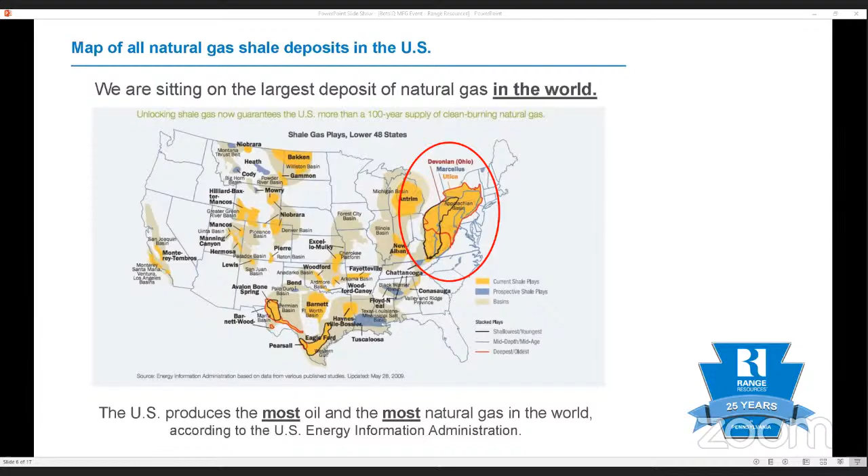United States produces more energy than any other country and is a leader in greenhouse gas emission reductions. These two major milestones are happening simultaneously thanks to companies like Range Resources, who have unlocked an abundance of American natural gas, a clean, versatile fuel that's used to heat and power our homes, cook our food, and create many of the plastic products we use daily.

Today, natural gas is the leading source for power generation, accounting for about one third of all U.S. power. In Pennsylvania, there are more than a dozen new combined-cycle gas-fired power plants that are planned, under construction, or have recently been brought online.

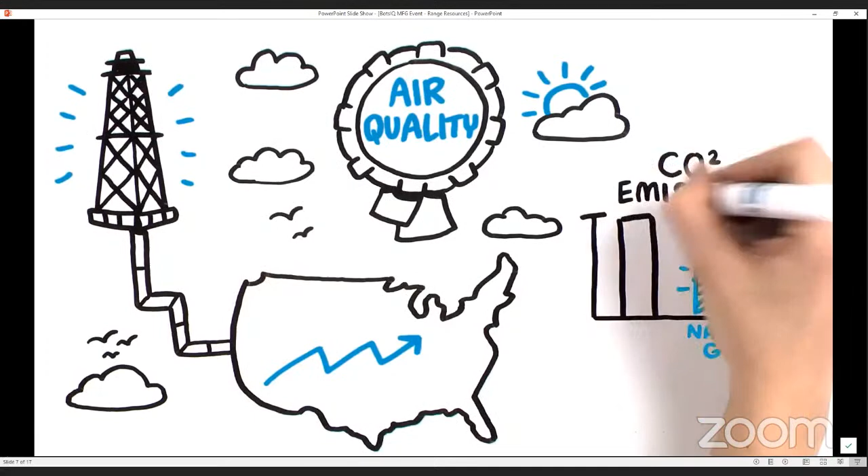As more natural gas is produced and used to generate a larger share of our nation's electricity, air quality dramatically improves since it emits just half the CO2 emissions compared to coal, the leading source for electricity generation until the shale revolution took off. In fact, U.S. CO2 emissions have fallen more than any other nation and are at the lowest level since the early 1990s.

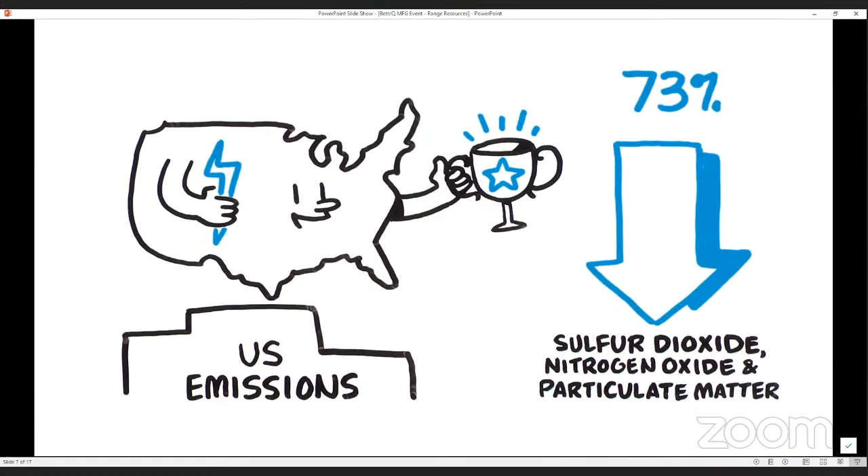The EPA says emissions of harmful air pollutants like sulfur dioxide, nitrogen oxide, and particulate matter plummeted 73% over that same period. Pennsylvania, a natural gas leader with strong regulations, is at the forefront of this important environmental progress. And so is Range Resources.

We are committed to maximizing these shared benefits by being good stewards of our environment and communities where we live and work. With a long, clear record of implementing innovative, effective environmental best practices, Range recently announced a commitment to achieve zero emissions across our operations.

We believe we can accomplish this by deploying advanced technologies, including custom-engineered production facilities that reduce emissions, a robust leak detection and repair program that requires regular inspections with special infrared or FLIR cameras, and a rigorous reporting program.

Thanks to American natural gas, we can all breathe easier, knowing our air is cleaner and our environment stronger.

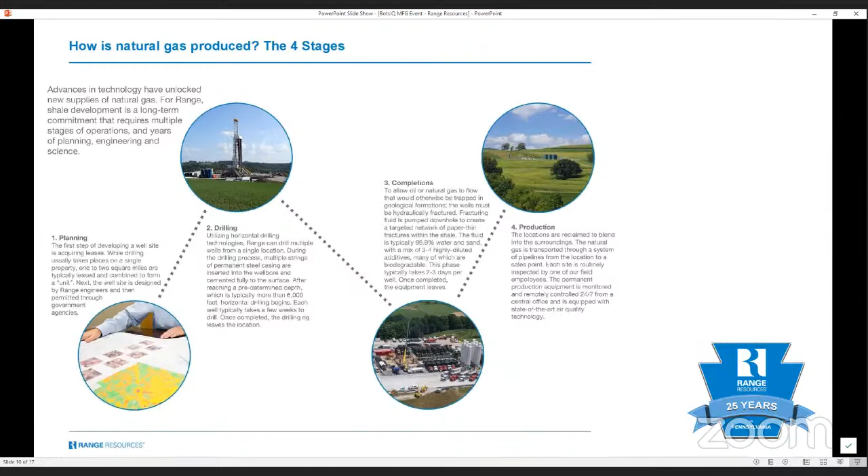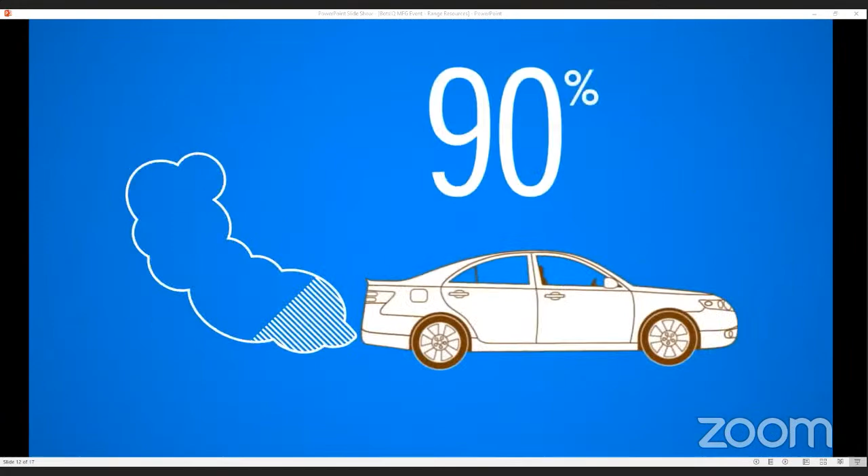Why natural gas? Natural gas is clean. A new supply of natural gas from shale formations is revolutionizing America's energy landscape. It emits 50% less CO2 than coal and 30% less than oil. And unlike coal, it emits no mercury. In vehicles, it creates 90% less smog, which all adds up to cleaner air.

Natural gas is affordable. As gasoline prices escalate, drivers want lower-cost options. Fueling cars with natural gas costs 60 to 70% less than gasoline or diesel. And with technical innovations, natural gas should remain low-priced in the future.

Natural gas is abundant. Shale formations in the U.S. hold enough natural gas to meet current demand for 100 years or more. In fact, the Marcellus Shale, which Range pioneered in 2004, is believed to be the second largest gas field ever. The U.S. has more natural gas than Saudi Arabia has oil, and is the world's top producer of natural gas.

Natural gas is American. 98% of the natural gas we use comes from North America, reducing dependence on foreign oil. And natural gas keeps dollars at home, supporting millions of Americans.

Natural gas is the future. Natural gas powers our homes, lowers transportation costs, reduces air pollution, and creates jobs. Range Resources is uncovering tomorrow's energy today.

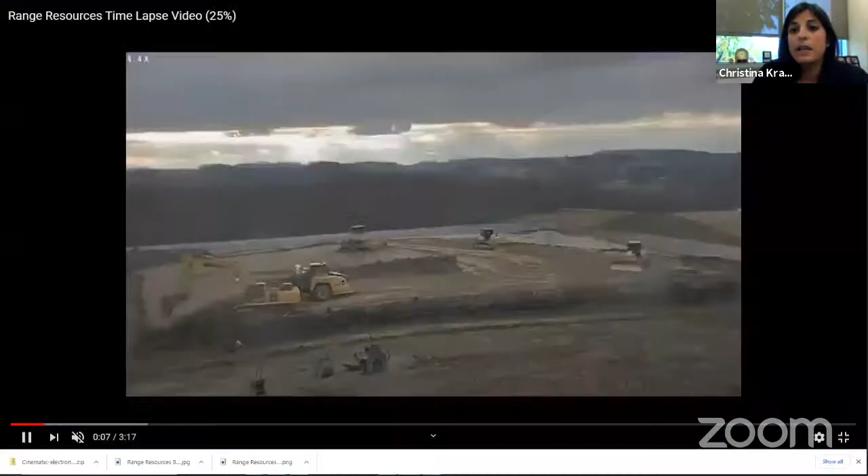During the planning stage, the very first step of developing a well site is acquiring leases from the people who own the land or the mineral rights to the land we'll be utilizing to develop natural gas. Next, the well site is designed by Range engineers, and then we work with local government agencies to gain permission and obtain the proper permits to be able to operate there.

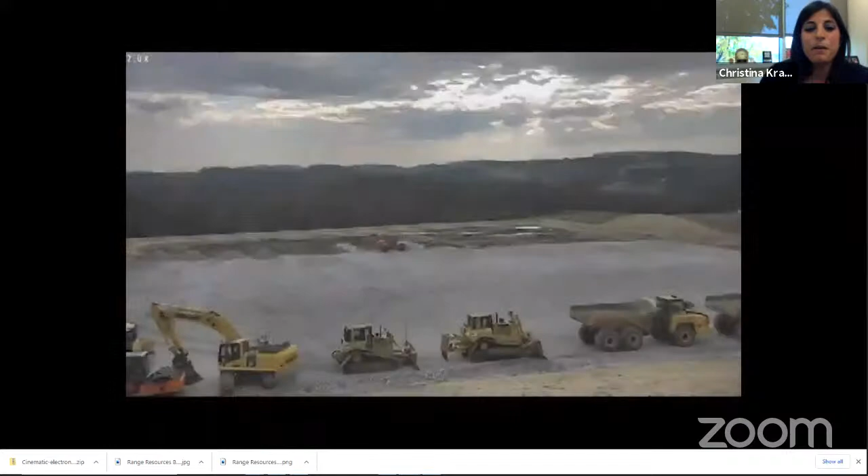So here's the construction of the well site going on here. And from a career perspective, you guys might think of natural gas and energy jobs as the people with the hard hats out there in the field. And those jobs are awesome and so important.

But with this planning process, it's a good way that shows that there are actually other jobs within the process - that you can work in an office. We have a legal department, we have a local government affairs department. So there are just so many careers. It's not a one size fits all or just one career that you can have.

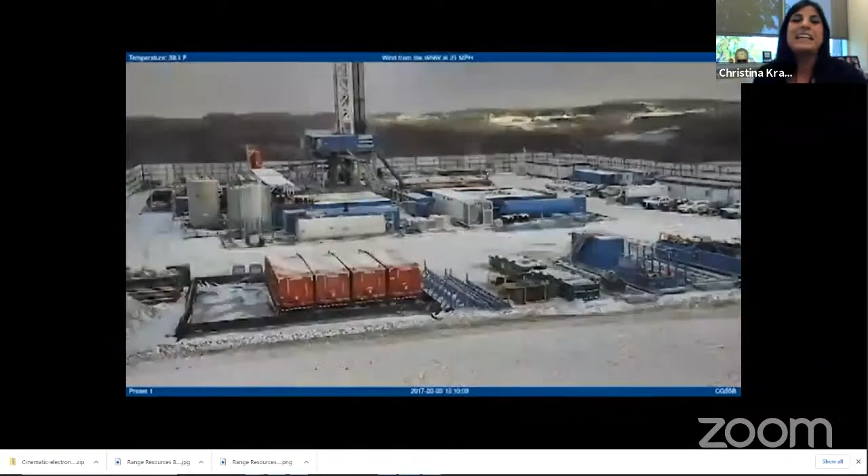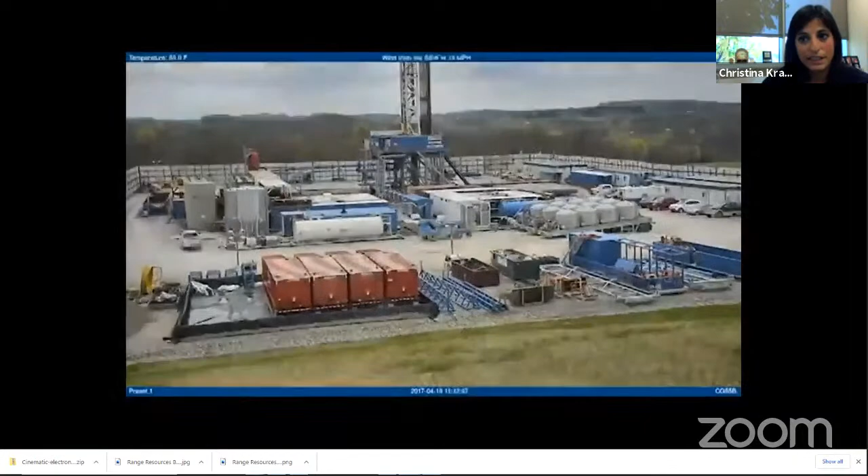And as the time-lapse video is going on, there you go - there's the drilling rig. So the second stage of the natural gas development process is drilling, and you'll get to see that today. Utilizing horizontal drilling technologies, Range can drill multiple wells from one single site. During the drilling process, multiple strings of permanent steel casing are inserted into the well and are cemented fully to the surface. After reaching a predetermined depth, which is typically more than 6,000 feet or about a mile beneath our feet, that's when horizontal drilling begins. Each individual well takes a few weeks to drill.

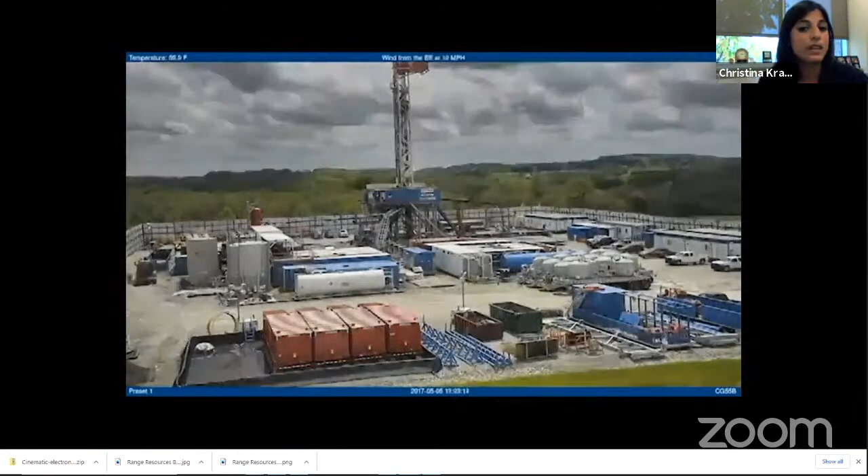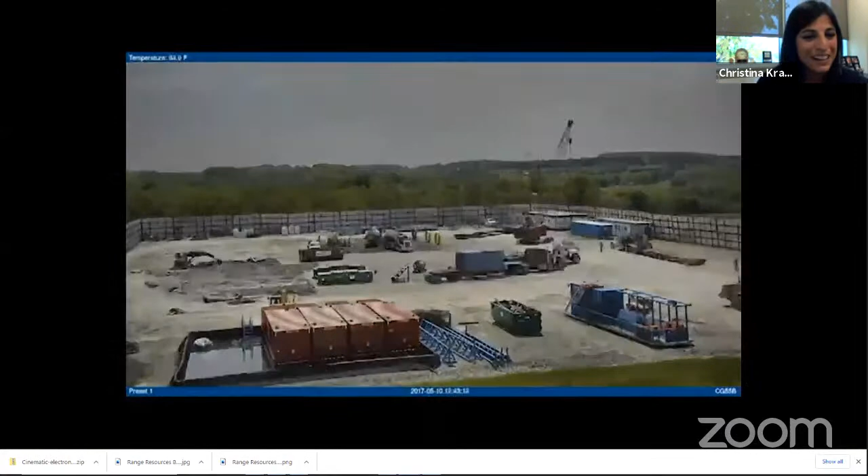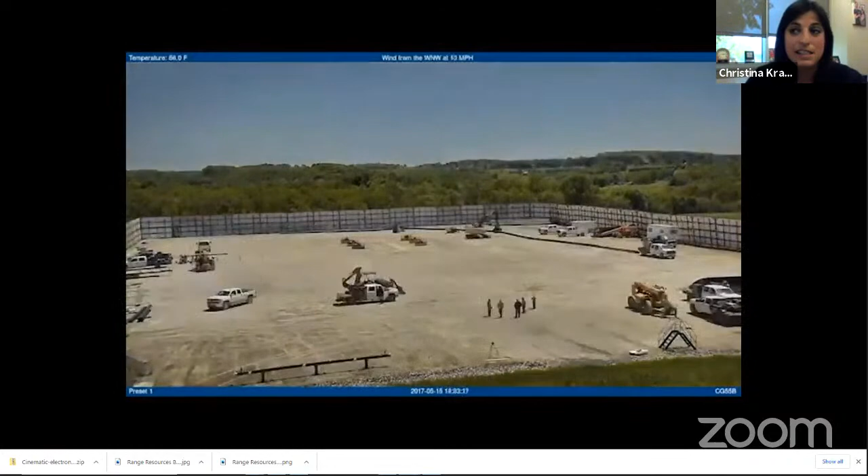Once those are completed, the drilling rig leaves the location and the third stage begins, and that's completions. But what we're looking at here is a Range drill site, so it hasn't quite moved into the completions stage yet - but there goes the drilling rig. So it looks like we're moving on to completions now. Perfect timing. This is where hydraulic fracturing, or fracking, takes place. This is the process that allows the natural gas to flow where it would otherwise be trapped in the rocks beneath the surface.

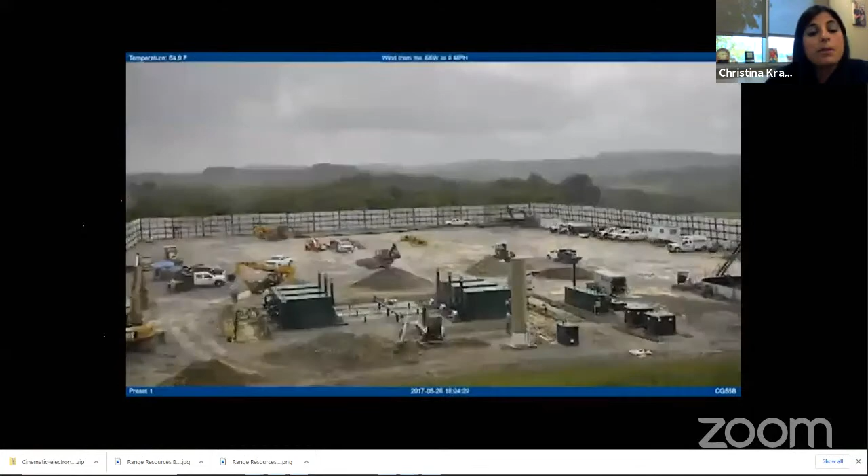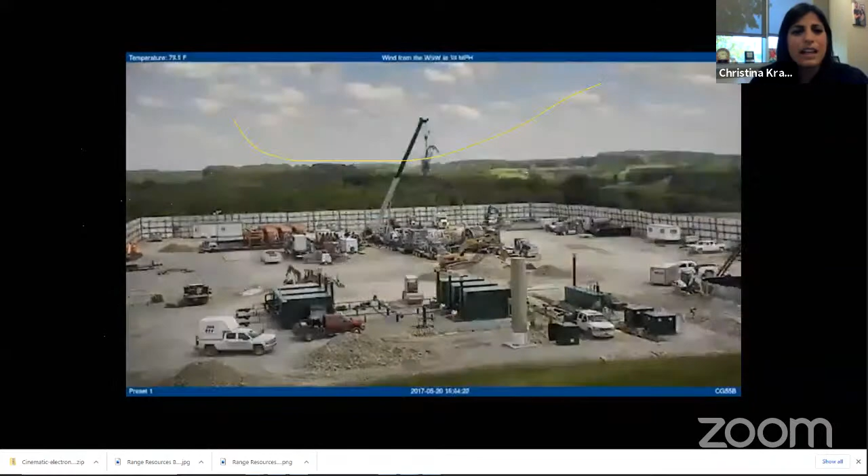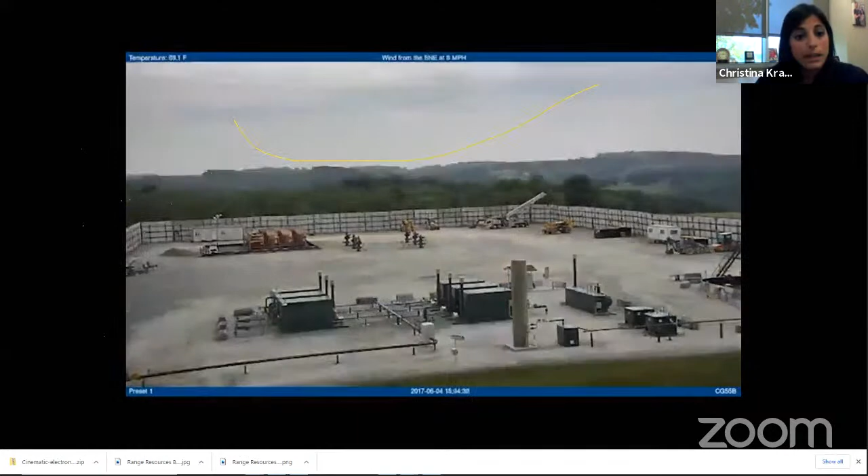Fracturing fluid is pumped downhole in each well to create a network of paper-thin fractures within the rock that allows the natural gas to flow. This fluid is typically 99.9% water and sand, and then the other 0.1% is a mix of highly diluted additives, many of which are biodegradable, like things you might find in your toothpaste. These additives make sure the fractures stay clean and remain open so the natural gas can flow through.

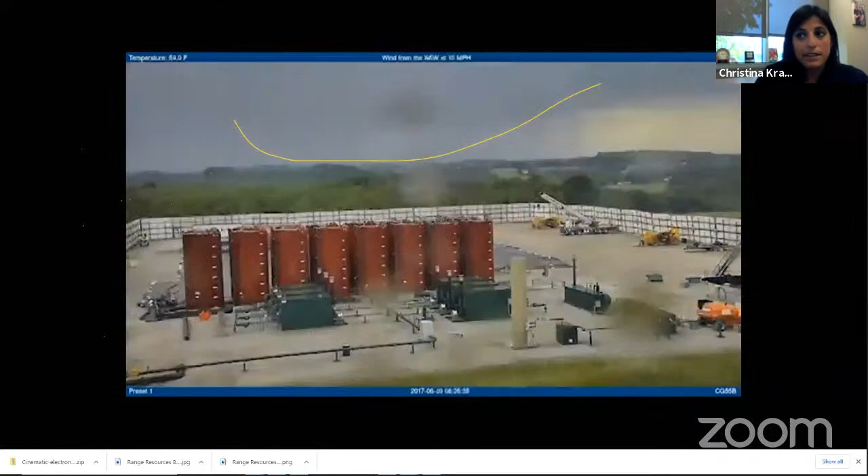This phase typically takes 2 to 3 days per well. Once that's completed, the equipment leaves and we move to the final stage of the natural gas development process, and that is the production phase.

You all are also going to get to see the production phase. That's when the natural gas flows through a system of pipelines from the location on pad to a sales point, and eventually to your homes and other facilities to be utilized for all the uses that we talked about.

Each site is reclaimed to blend in with the natural surroundings, and you'll see that today. Each site is also monitored 24/7 from our remote field office. But in addition to that, we have employees that inspect these sites on a daily basis.

Now that we got all that out of the way and you guys know all about the 4 stages of the natural gas development process, I am very excited to send you all out virtually into the field. We are going to go to a drilling site.

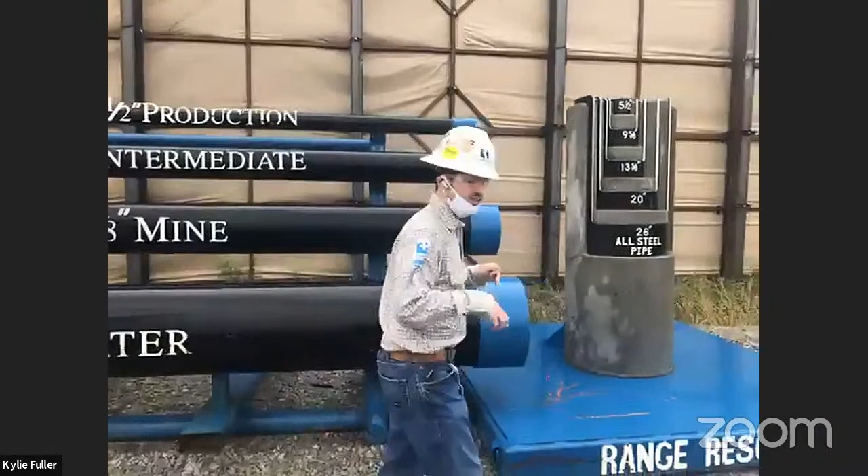As you can see here, we have examples of different strings of steel pipe or casing that are set in the wells. One of the very interesting things about drilling a Marcellus well on our piece of the process is it actually takes not 1, but 2 rigs in order to successfully get these wells ready to drill the curve and lateral sections. So let's talk a little bit more about that.

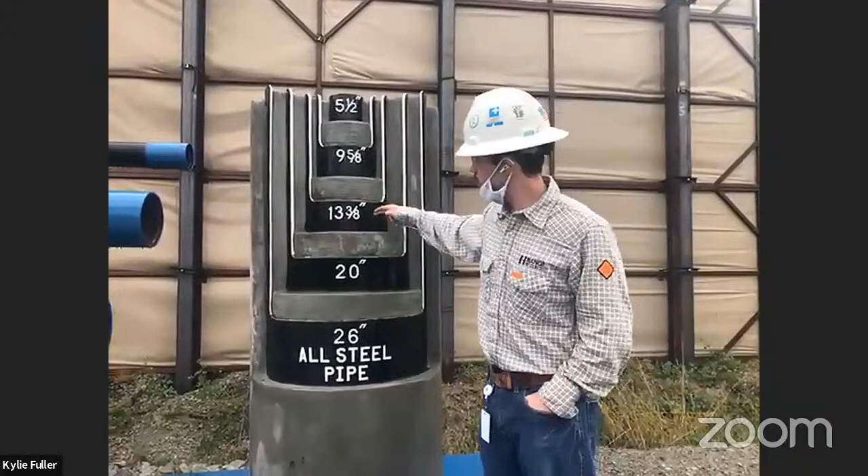Whenever we first prepare a pad for a number of wells that we're going to drill, we will have a rig that comes in first, which is the top hole rig or the air rig. This will drill the well from the surface all the way down to the kickoff point, or the point in the well in which the wellbore will become deviated from its vertical position. We will start drilling the curve section. So the top hole rig will set and cement the 20-inch casing, the 13 3/8-inch casing, and the 9 5/8-inch casing. Let's back up and talk about what each of those strings of pipe actually does in the well.

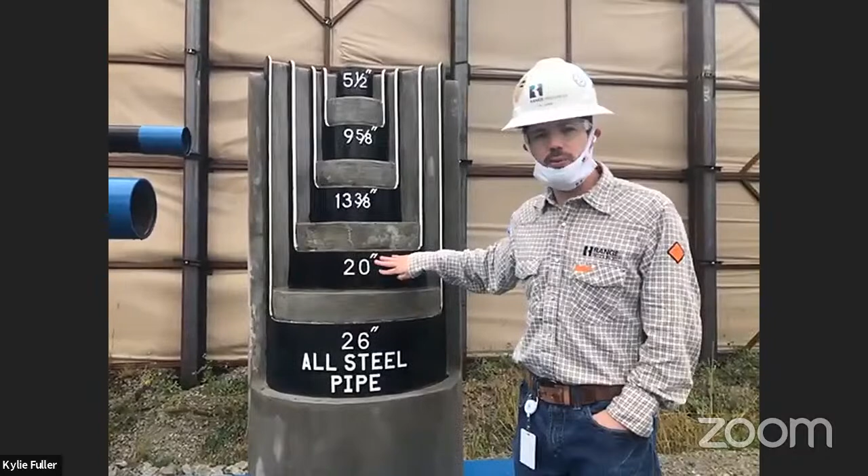Our 20-inch casing is our water protection casing. We set and cement this casing all the way back to surface to protect any freshwater zones that are surrounding the pad.

Afterwards, the rig will drill, and then they will set our coal protection casing, or 13 3/8-inch outer diameter casing. Due to being in coal country in Appalachia, there are coal seams present, mined out, or still intact. We want to make sure we isolate those and protect them from the wellbore, so the 13 3/8-inch casing string is run and then cemented completely back to surface.

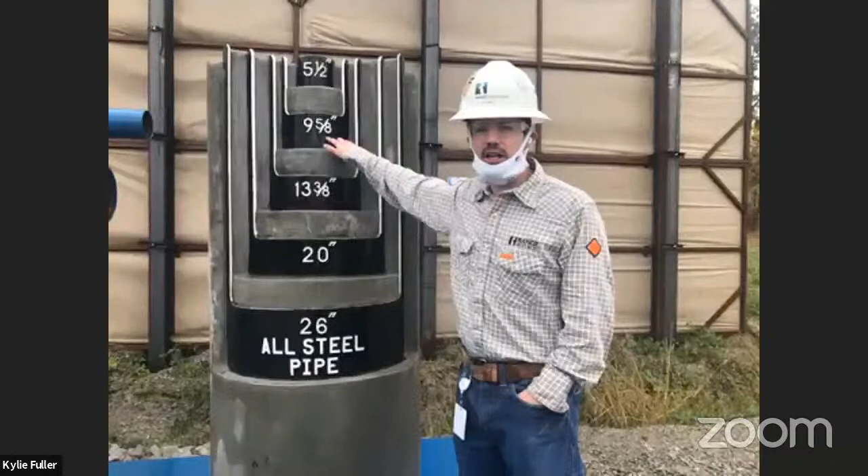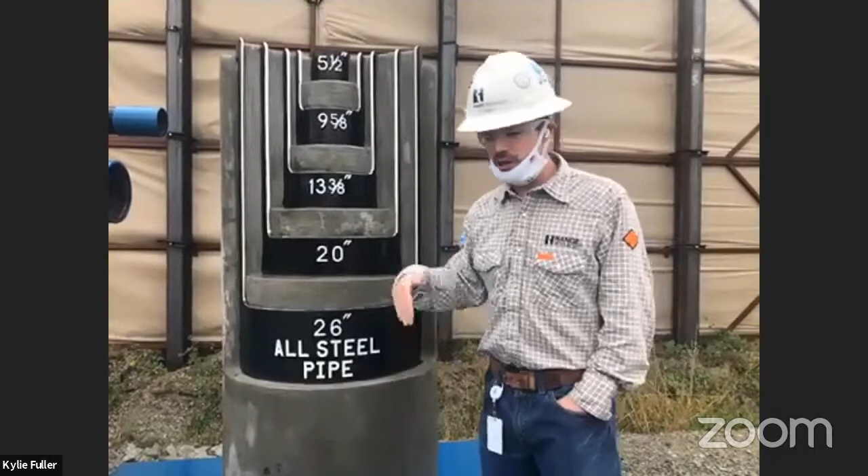After that, the rig will run, set, and cement an intermediate string of pipe, known as our 9 5/8-inch casing. This helps protect the well from any additional troublesome zones that could be underneath before we drill down to kickoff point. Then whenever the rig is done, it will run this 5.5-inch production casing that goes all the way from the surface of the well out to the total depth, and then again is cemented.

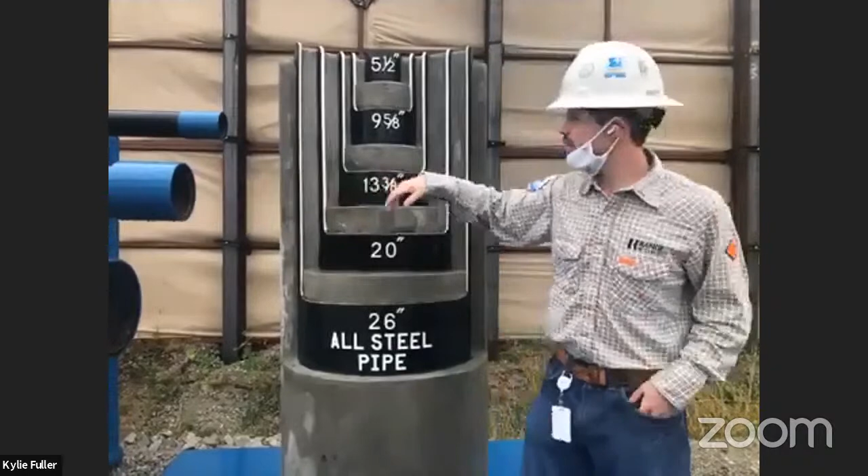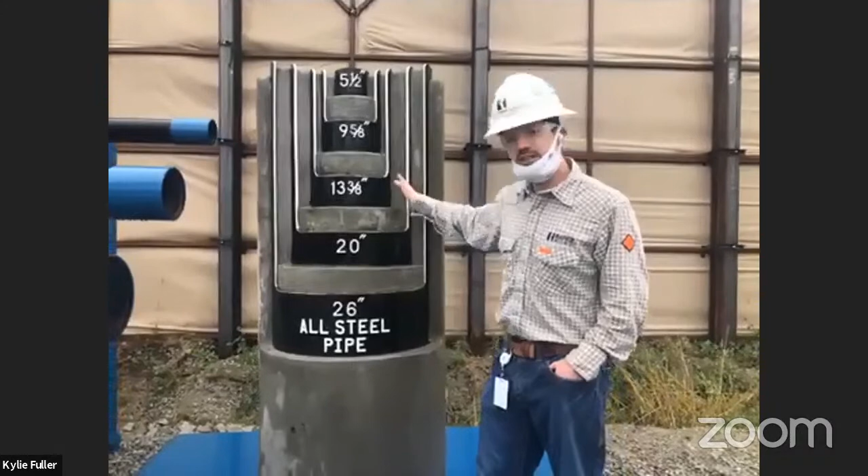So here's a great example of a cutaway, if you were to take a cross section of each of those strings of casing and the different layers of cement that are used to help protect the well from the surrounding formation. As you can see, it's a very detailed and in-depth process, and there's a lot that goes into it.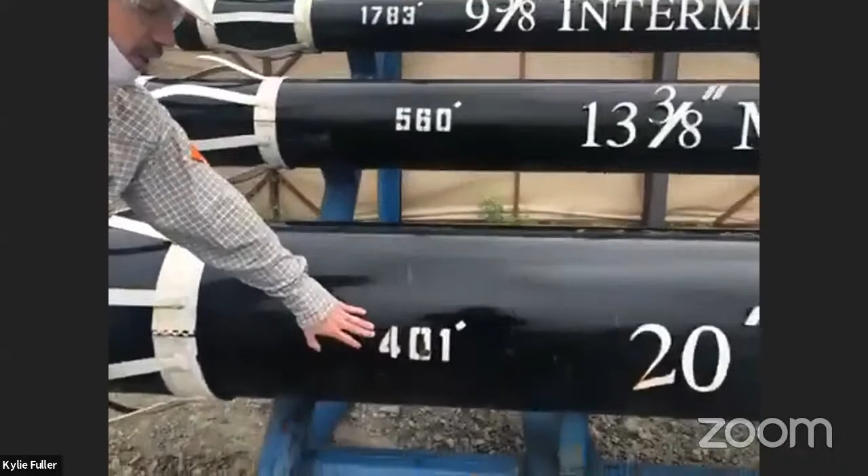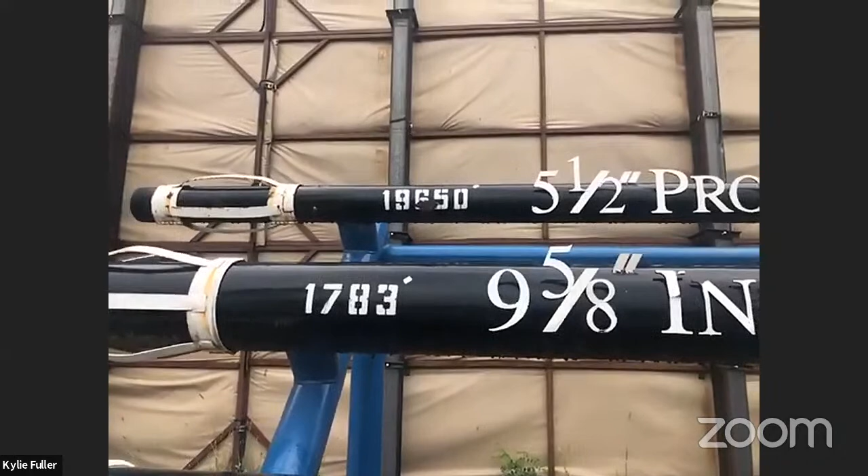Now that we've got a general overview of the air rig and how we got to this point, let's look back over here at another example of what these strings do. For an example depth where these would be set: the water protection string is set to roughly 400 feet and cemented to surface, the mine protection string a little over 500, and our intermediate string is set to 1800 in this example. Then the production string is set all the way from surface to the tippy toe of the well. These devices shown on the end are called centralizers.

What these centralizers do is, whenever we run the casing in the well, they are installed to keep the pipe centered in the middle of the hole. That way, whenever we pump our cement, we get a nice uniform cement sheath all the way around the outer layer of the casing, again to protect the well from everything around it. So this is a basic overview of the process we have for the 2 air rig setup.

A couple things I want to point out while we're here: you can see these large walls behind me that are set up, known as sound walls. Part of what we do at Range before we get to a site to drill a well is perform sound modeling studies. We want to make sure we're being good temporary neighbors while we're here drilling these wells, so the sound walls are installed to help lessen any sound impact we think we might have for our neighbors in the community.

Another interesting fact is we have containment, which is a 60 mil plastic liner that is run and set all the way around the rig, as an added layer of protection. If in the event we were to have any type of incidental release, we know it is protected and not hitting the ground. So those are a couple things we have as best practices here at Range.

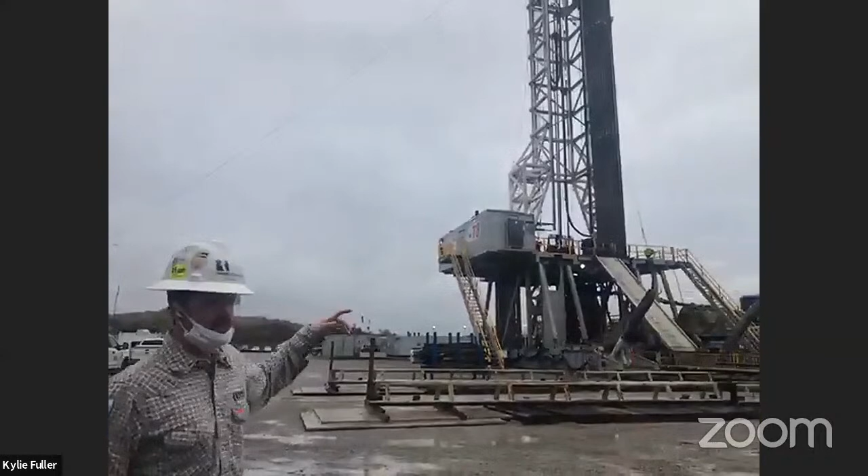So that's some of the background. Let's talk about the rig a little bit while we're here. This is Pioneer 78. Pioneer 78 first came to Range in 2015 and has since drilled many successful wells for Range. Let's go back in time a little bit to talk about where we got to where we are today.

If you rewind all the way back to 2013, the average lateral length, or the horizontal section of the wellbore that we would drill, was only about 3,500 feet. Today, Range, with our current technologies and best practices, has been able to extend those lateral lengths from 3,500 feet all the way over to 19,000 plus feet. That's just the lateral section of the well. So we've been able to substantially increase our laterals that we've drilled over the years.

One of the nice things about this is it creates less surface disturbance and allows us to access more of the Marcellus shale that we talked about before. So as we progress through the tour, we're going to take a look at some of the technology and different things we use to successfully drill the wells.

As we take a look around the site, just want to point out a couple things as we look at the rig. The big white thing in the air is what is known as the derrick. If you take the rig from the base all the way to the tippy top, it is just under 170 feet.

We are currently drilling the lateral section right now. If you look up the middle, we see the drill pipe rotating as it comes down. On the right of the rig in the derrick, we see the drill pipe that is made up. This rig is known as a triples rig because we have 3 pieces of drill pipe screwed together to make one stand. Each stand we drill is roughly 90 feet in length. After we drill down one of those 90-foot sections, we stop and screw in an additional piece of drill pipe to continue drilling where we are in the curve, or in this case, the lateral section of the well.

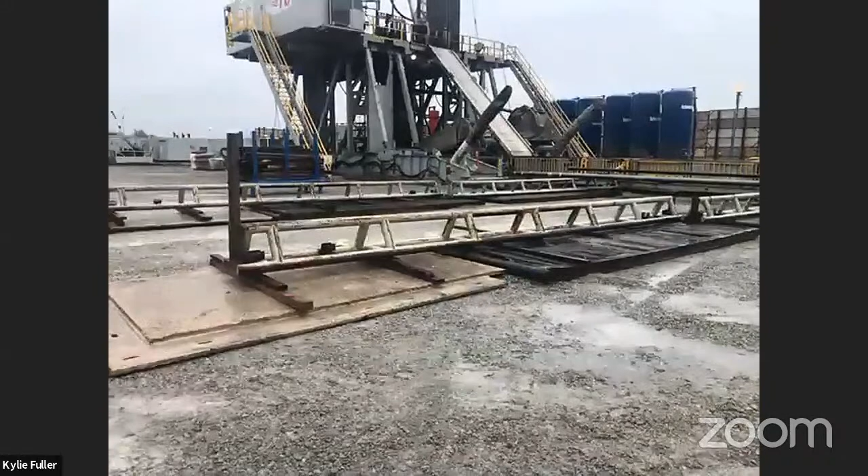Now let's talk a little bit about the personnel we have on location here that man our operations. Typically our personnel work on hitches of 2 weeks on and 2 weeks off.

I am very lucky today to be joined by some very special guests. I have Mr. John Fountain, one of our horizontal drilling superintendents. And we have Melissa Shaughnessy, who helps with office work as well as field work at Range. Very lucky to have them here today.

So let's talk about John. John works 2 weeks on and 2 weeks off. The way this works is John comes to work for 2 weeks. Unfortunately, John's a big dog, so he's on call 24/7, but typically the guys work 12-hour shifts. You come to work for your 2 weeks, and typically individuals live at the rig in our on-site accommodations that are temporary while the rig is here. It's a 12-hour shift, and they do that for 2 weeks, then they go on their time off and enjoy their 2 weeks off.

John has been working in the oil field for a long time and is a specialist at what he does, and has personally taught me a lot of things. So I'm glad he was able to join us today. Thanks for being here, John.

Thank you, Melissa. So let's pan back to the rig and talk about what we have over here a little more. We said when we first started that there are 7 wells on this pad. The 7 wells on this pad are spaced out on the surface 20 feet apart from each other. One of the interesting things about this rig is it has the ability to walk.

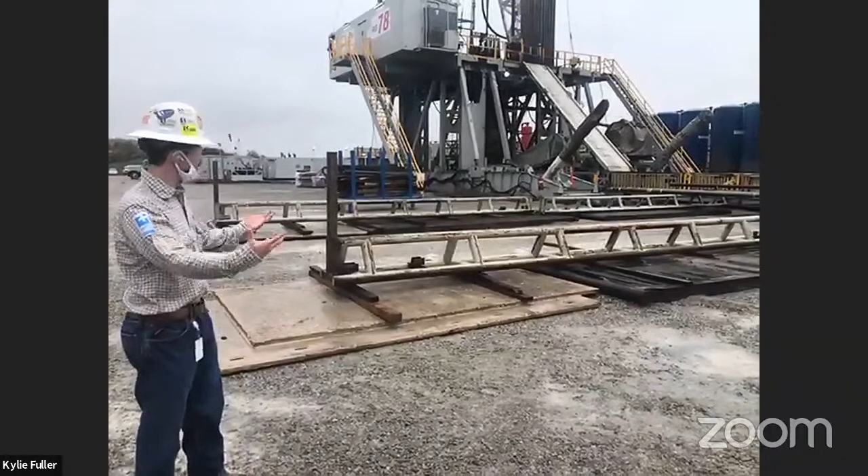It has a system of pistons underneath it that literally pick the rig up off the ground with all of the drill pipe and the derrick, and walk the rig 20 feet to the next well. For reference, this rig can walk 20 feet in about an hour. This is an amazing feat.

It's a newer thing. Back in the day, before rigs had these walking packages, the weight of the drill pipe itself was too much, and they would have to lay down all the drill pipe in order to hook the rig up with dozers and drag it to the next well. As a reference, to lay down and pick up all this drill pipe would take about 2 days, depending on how long we're drilling. So it's an amazing feat of efficiency that we can do what would take days prior in just an hour to walk over to the next well.

So let's sneak in a little bit closer and get a little more detail on some of the other things that we have on this rig as well.

Where you see 'rig 78' on the side, that's what's known on the rig as the doghouse. A gentleman operating this rig is known as the driller. He's currently in there now, and he can operate everything on this rig, from the amount of weight we're placing on the bit to drill, the rotary speed, the pumps, and the drilling fluid downhole to cool and lubricate the bit, as well as clean the cuttings out.

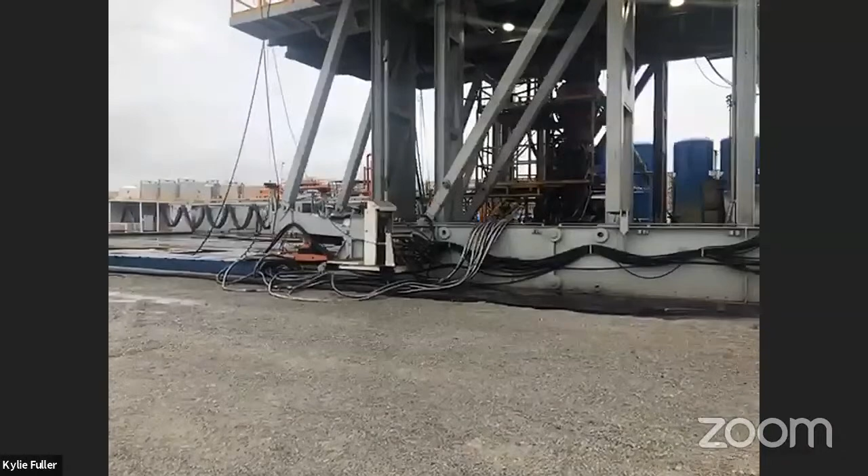If we look over here and sneak in a little closer, we can see specialized equipment set up underneath this rig, known as our BOP, or blowout prevention equipment. This is a special configuration of rams and valves used if we get into a situation where we need to safely secure the well. This equipment is installed on every well prior to drilling, and it's pressure tested before use to ensure it's functioning correctly. We pressure test it again on every well, and also if something were to happen, or if 21 days lapse. We want to make sure it's good because it's one of our first lines of defense if something were to happen.

So we covered some interesting stuff about the rig. We talked about the sound walls on location that Range does, and we talked about the containment. I want to take this opportunity now to show you some of the specialized tools we use downhole to drill these wells.

We talked earlier that Range has taken our lateral lengths from about 3,500 feet to well over 19,000 feet, which is an incredible feat. So how did we get there? What's our story? What improvements did we make? One of the big pieces of the puzzle, and what's gotten us that far, is our advancements in technology and the tools we use.

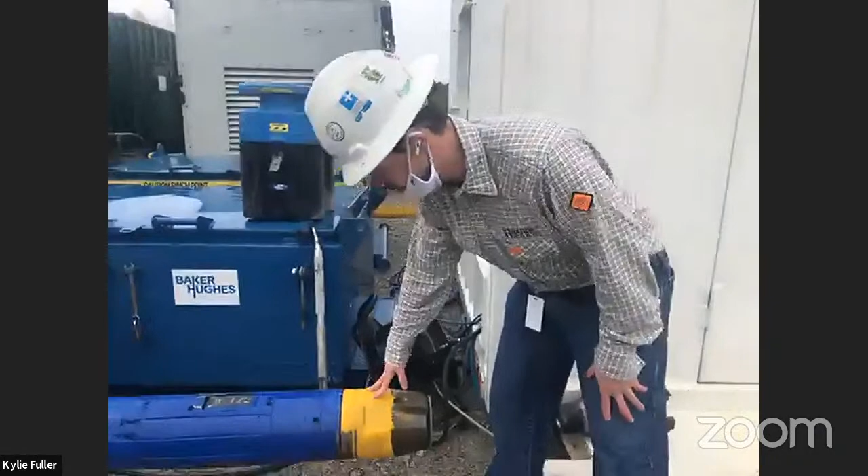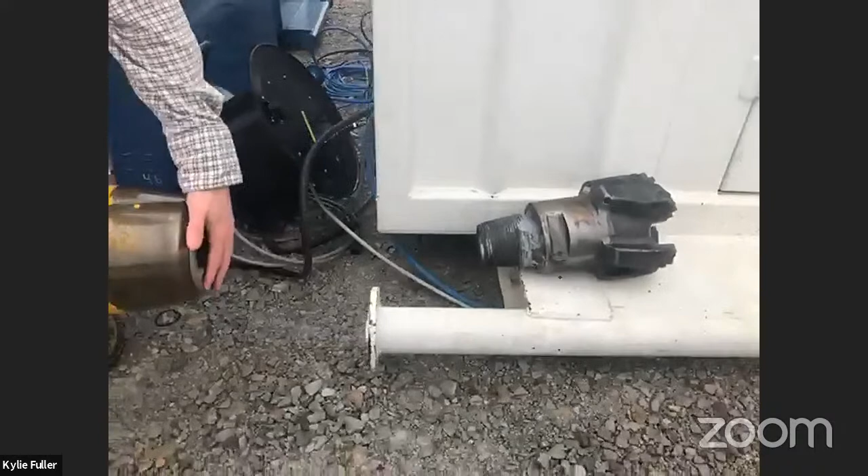To give you an example, this is what's known as a rotary steerable tool. This is literally what's on the bottom of the drill string right now, drilling the well. This tool continuously rotates. The drill bit is screwed on up front, and it's literally turning and shearing the rock to create the cuttings and drill the hole.

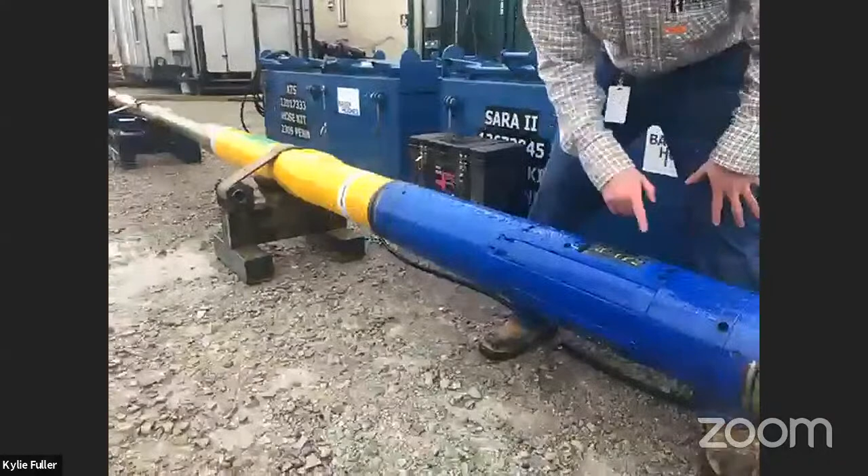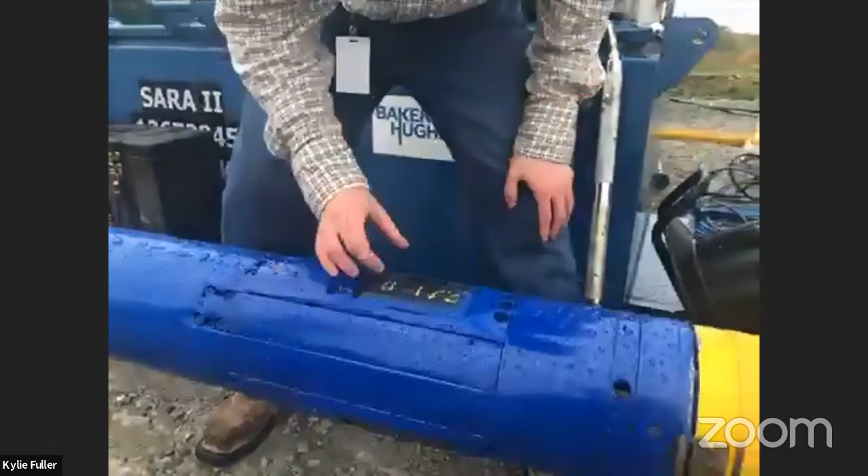Now this tool is very smart. It continuously turns, and if you look right here, we have 3 pads on this tool. When it's turning, it's smart enough to know where these pads are in space. These pads will literally kick and deflect the tool where we want it to go. For instance, if we're drilling at the bottom of the well and need to steer it up, these pads will kick the well on the bottom to deflect the bit up.

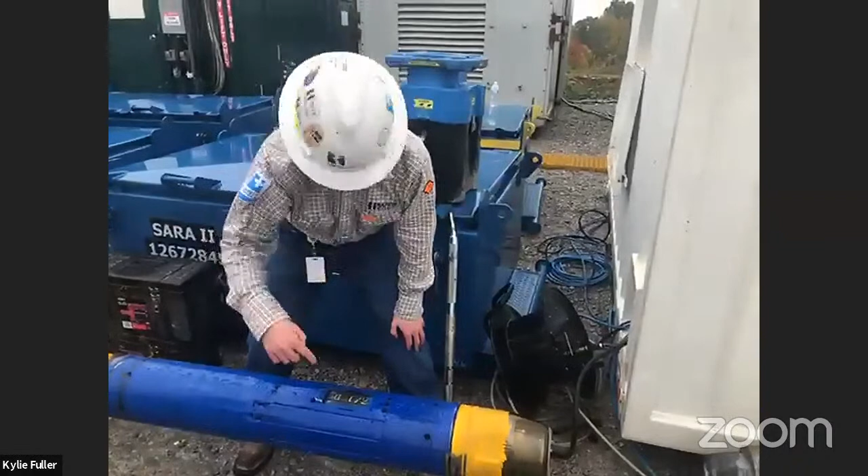It does the same thing for left and right, all in real time while this tool is rotating. To give you an example, while rotating, this tool on surface is typically about 150 RPMs. So this tool is very intelligent and knows exactly where we are.

One of the other things we haven't touched on is that while drilling this well, miles and miles, we're actively steering the well within a 10 to 15 foot window. We have a huge team of individuals here on the rig site and remotely, and one of the big pieces of the puzzle are geologists who actively steer the well while we're drilling.

This tool literally pumps up information via pressure pulses in our drilling fluid, and it helps the directional driller who's steering the well, as well as the geologist who navigates the well to ensure we're keeping it in the proper zone. That's one of the key things we want to do: make sure we're placing the well in the crucial intervals where it needs to be. So that's our rotary steerable tool, which is used to drill the well.

Let's see if I can snag this here.

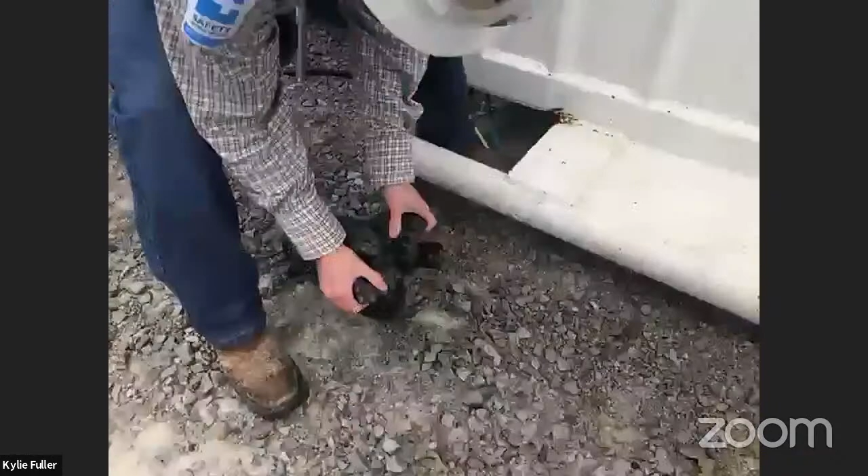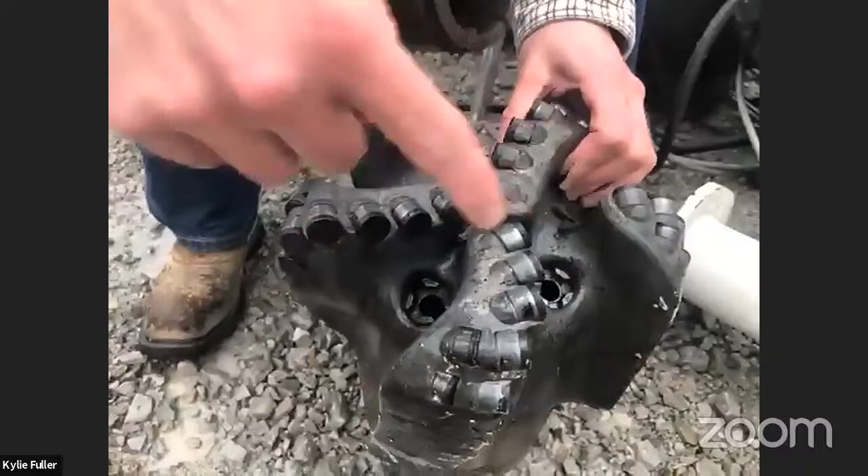This is known as a PDC bit, or a polycrystalline diamond compact bit. This is what is on the end of the drill string, which is drilling the well right now. These bits are characterized by the number of blades they have—here we have 5 blades, as well as the cutters on the bit. These cutters are made out of tungsten carbide, and they literally shear the rock while we're drilling. They're typically characterized by their size in millimeters. In the middle, we have these jets, which are part of the package that controls the hydraulics for the tool. The jets are sized so that when the drilling fluid exits the bit, it helps cool the bit, lubricate it, and clean away the cuttings from the face of the bit so we can continue drilling successfully.

That's probably the Marcellus shale right there, since this one's been used—a little Marcellus cutting stuff in there. So this is an example of what's on the end of this drill bit right now, and having already drilled a well, it looks pretty good. Not a lot of the cutters are chipped, everything looks very nice. These bits are great for drilling in our shale formations here in the Appalachian Basin in Pennsylvania.

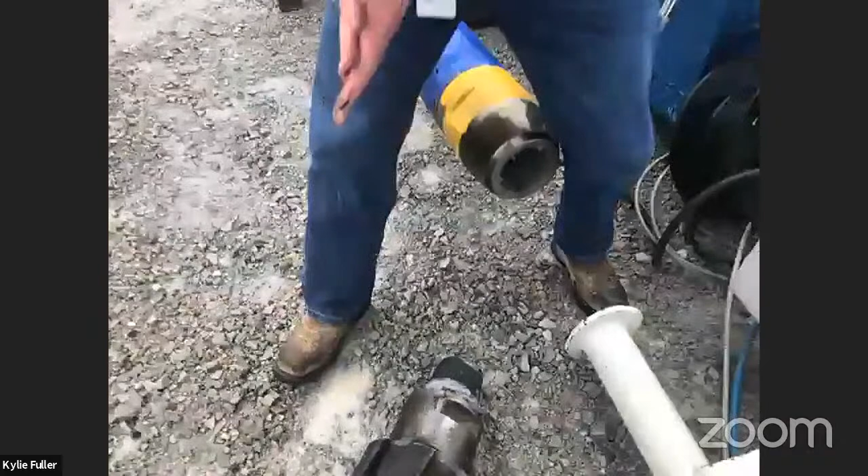We will continue drilling this well to roughly 16,000 feet before we pull that directional tool all the way out of the well, and then run our last string of casing, the 5.5-inch production casing string. At that point we will again pump cement on the well, and it will be secured and ready to hand over to the next phase in the process, which is completion, where they will begin the hydraulic fracturing process. Before we move on, does anybody have any questions?

Hey, thanks, hi Pat and Kylie. Go ahead, sorry, Michelle—Maria. We have a couple quick questions that came in. One was about when you were showing the technology a few minutes ago, the new drill bit and the pipe—do you have folks at Range Resources who kind of invent these things? How do you come up with those?

That's a great question. We're very fortunate, because it would be an impossible feat realistically if one person were to try to undertake all of this on their own. We have a lot of third-party providers and service contractors that we work with. We develop some things on our end, and a lot of them have outstanding technology that we use and apply in our current wells. So I would say we have some in-house, undoubtedly, and we have some from their expertise as well, in order to help us successfully drill these wells.

And one more question came about the drill bit—about how long do they last? We typically will utilize these drill bits to drill one well, but the nice thing about these PDC bits is they're able to be refaced and reused if there is some damage. I don't have an average number, but I'd say you could get 3 to 5 runs out of one bit.

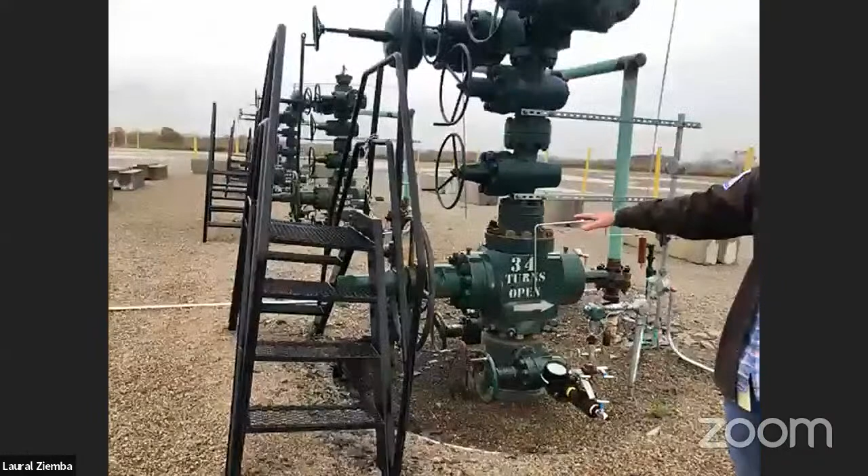We'll start here with the wellheads, starting at the bottom. This very bottom valve with the largest handle is the frac valve. Then we have 2 master valves above that, and 2 wing valves across the top. The largest valve with the handle that sticks out is our ESD valve, which stands for emergency shutdown.

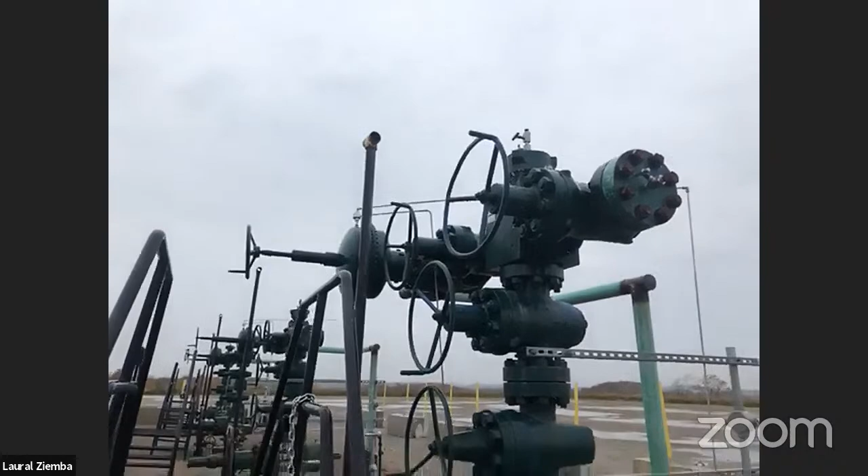There are many parameters across the whole site and all the equipment we'll see today that can automatically shut the well in. So if it's high pressure, low pressure, high temperature, low temperature, or the tank gets too high, it will automatically shut the well in, which means any gas, water, or condensate flowing through this well will be shut in. The ESD valve itself can also be triggered manually, there are probably about 5 buttons located on the site.

You can just push the button and it'll completely shut all equipment down on the site. We have a gas control room as well that monitors every site we have in the field, and they can also, if they see something going on their screen, remotely emergency shut down the well. They can do it individually, or they can do a whole site where it'll shut in all the wells and all the pieces of equipment.

So now that we talked about the valves themselves, after the completions phase is finished, this is pretty much what a production site looks like, and this is the wellhead here.

The water, and I say oil a lot of times, it's actually a condensate. What condensate is, it's a clear, opaque liquid, kind of like gasoline. If you had it in a glass jar, it would almost look like cloudy water.

So that all flows up through the wellhead, through all the valves I mentioned, through the ESD valve, and then it goes into our flow line here, which is a light green piece of equipment, and goes into the ground, over to our gas production units.

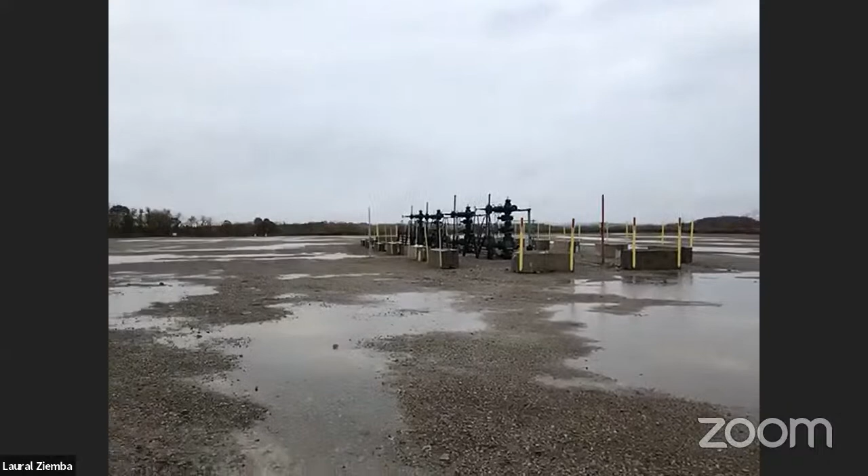I don't know if she took a shot of the site. The site size is about 3.5 football fields in total. This is pretty much what the site will look like for the rest of time, as far as we know, until the wells deplete, which can range. We've heard 25 to 40 years, just depending on the wells and the formation itself.

So these big green boxes over here are what we call the gas production units. As she gets over here, we'll start pretty much where the gas comes up out of the ground. That flow line she showed you over there at the wellheads is buried underground, and it comes up right here.

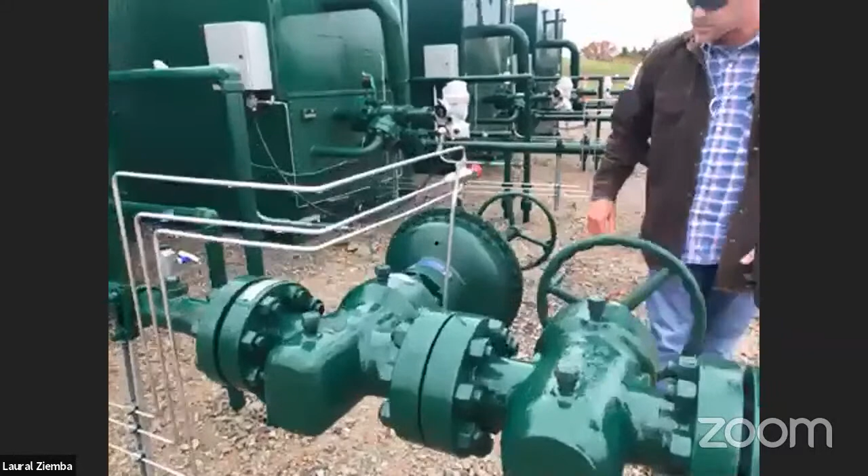Then we have another valve, just an isolation valve called a block valve. And then we have a secondary ESD valve, emergency shutdown valve. This also will trip based on the parameters I spoke about, and it has its own button. If something were to go on and we needed to isolate the gas, we could just push this button.

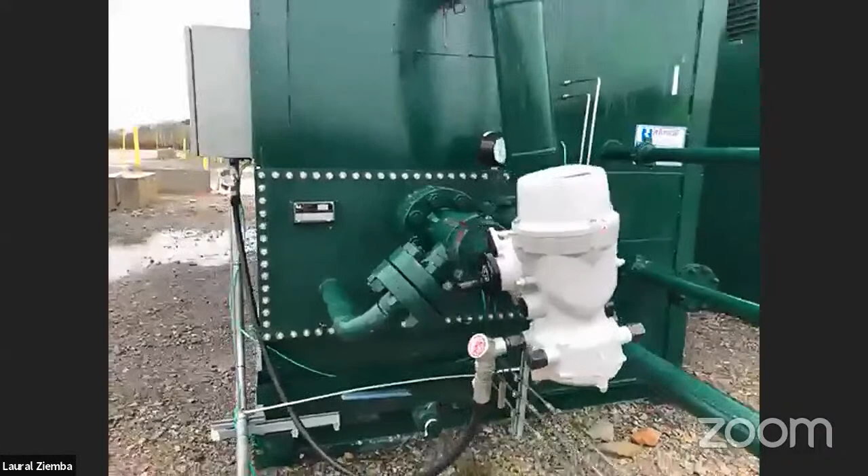Another interesting piece is our automated choke. This here will control the flow or pressure coming from the wellhead. The wellhead is rated for a lot higher pressure than these units are themselves, so we have to have a device that will control that pressure, and that is our automated choke. We can set in a flow rate, how much we want it to flow, and a pressure as well, and it will look at those parameters and automatically open and close as needed. This valve will also close if one of the emergency shutdown buttons are pushed.

So Laural, if you want to come around, we'll look inside of the gas production unit itself.

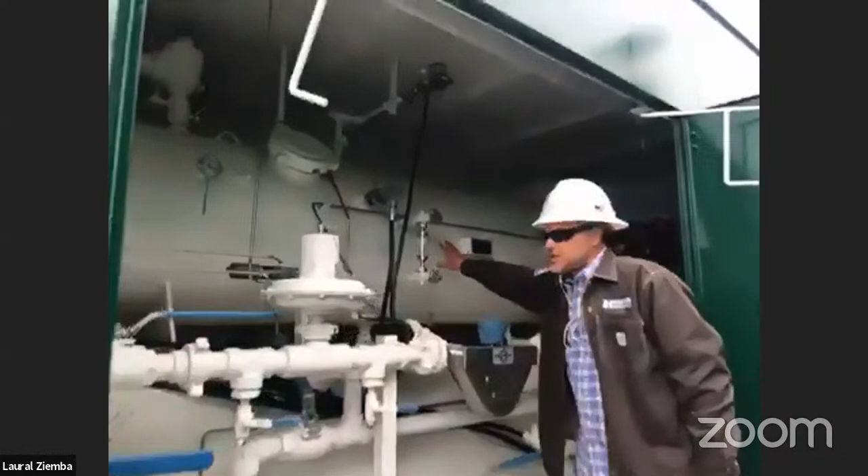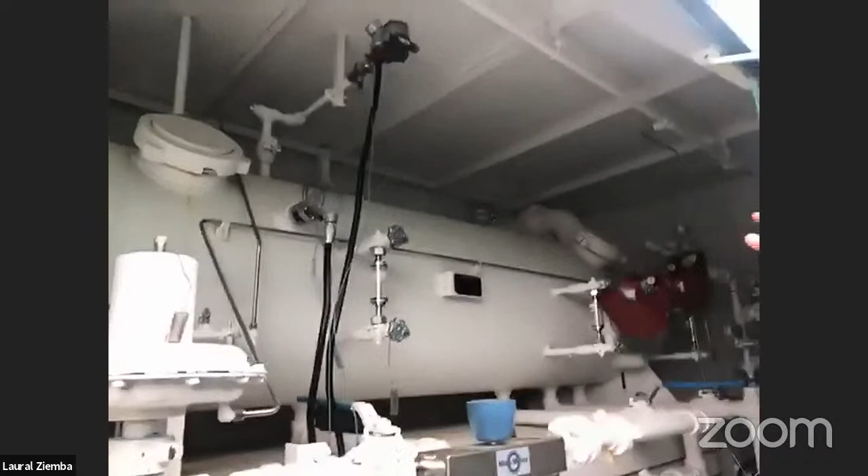So this here is the actual separator. That's where the water, oil, and gas is going in. The water will drop to the bottom, the oil will sit on top of the water, and then the gas will go across the top and out the other side. This is where each individual gas production unit is metered, so we'll know how much gas is coming out of each well.

As the water and oil separate, they each have their own dump valve so we can get the fluids out of the separator. The water is dumped straight to our tanks, and the condensate is dumped to a heated flash separator, then onto a vapor recovery tower, and then to our tanks.

As we walk through the rest of the site, we'll go through them. We also meter how much water comes out and how much condensate comes out. We'll head back out this way, Laural.

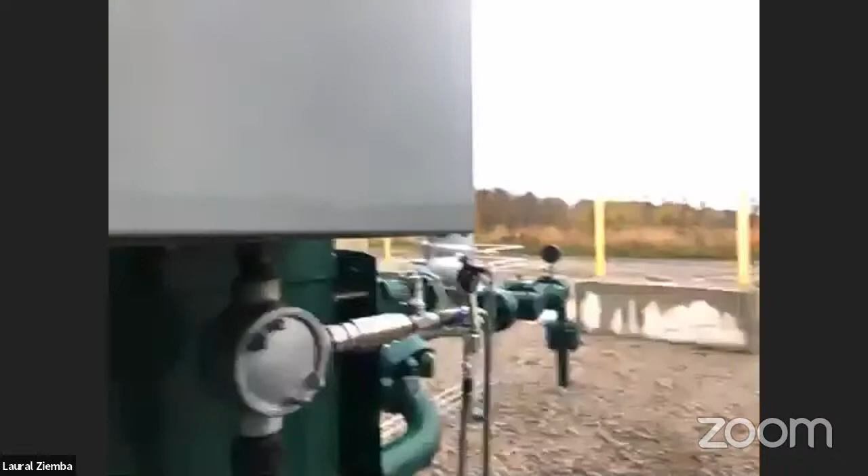So just to our left here, all the wells individually go into the gas production unit. Then they meet up in a common pipe behind the gas production units. We meter it one more time collectively, all 4 wells together. Then it goes to our pig launcher and then to our pipeline, and then on to our compressor station for MarkWest, and then on to the Houston plant.

So we'll walk over to our next piece of equipment over here, which is our heated flash separator. This is one of the emergency shutdown buttons I mentioned earlier.

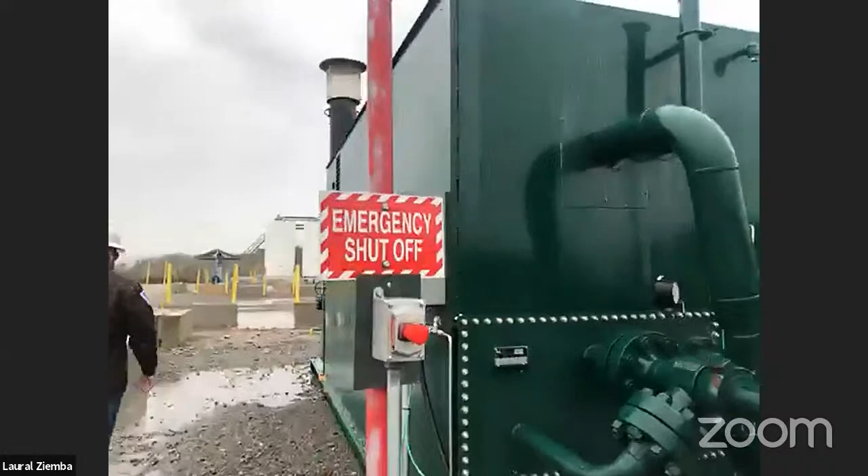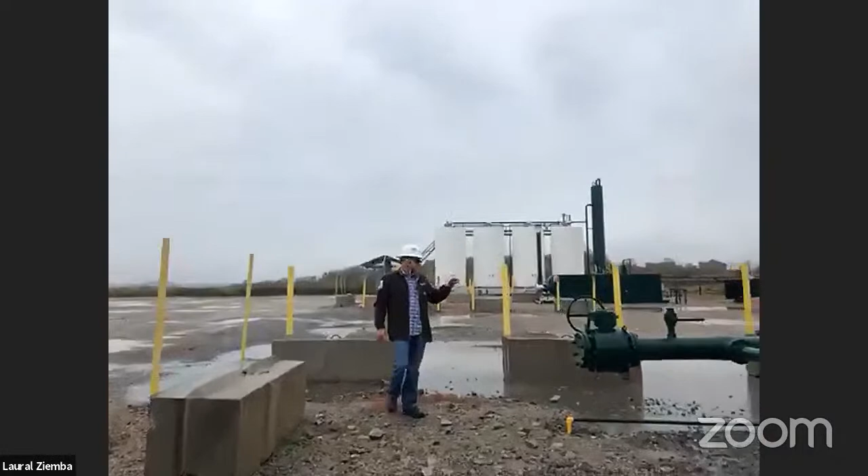Coming out of the back of the gas production units here, as I just mentioned, you can see where all 4 of them come into a common line, and then that's piped over to our compressor station, and then the plant, and then on eventually to your homes.

Like I said, our next piece of equipment is our heated flash separator. All the oil from all the wells is dumped into this vessel here, the rectangular green box. The heated part, obviously, we want to heat up the condensate because it's a volatile product, so we need to stabilize it before it gets to the tanks. We have a burner tube in there that uses natural gas to heat it up.

As the condensate heats up, the vapors release from it. Once some of those release, it is dumped from the heated flash separator to our vapor recovery tower, which is that tall tower in the back here. It's pretty much the same idea without heat.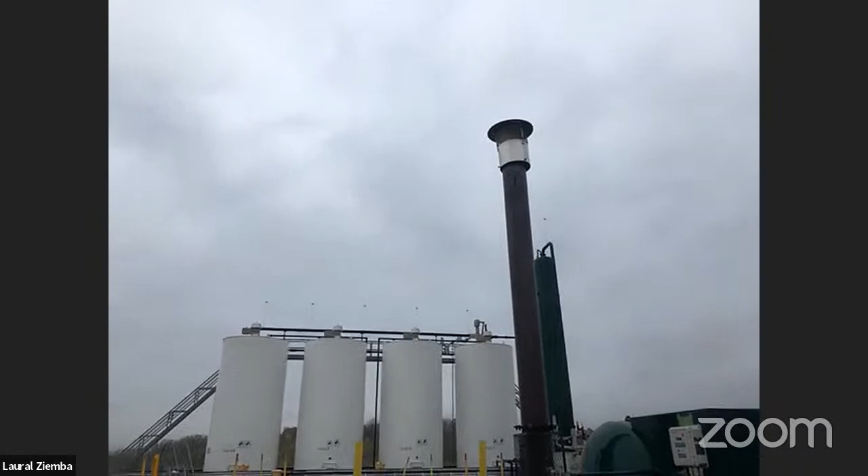So we need to stabilize the product some more, so that vessel is at a lower pressure. We're right around 150 to 200 pounds on the gas production units. The heater flash separator runs around 35 pounds, and the VRT, the vapor recovery tower, runs anywhere between 2 and 6 pounds. So as we add heat here, the lower pressure there releases more of the vapors and helps stabilize the products even more.

I mentioned both of these pieces of equipment release vapors, so what do we do with those vapors? Behind the heater flash are 2 smaller boxes, which are VRUs, vapor recovery units. They pull the vapors out of the heater flash separator, compress them, and put them back into the sales line. The other vapor recovery unit pulls the vapors out of the vapor recovery tower and also puts them back into the sales line.

So the vapors themselves are worth money. We don't ever want any vapors getting into the atmosphere because they are actually worth money to us, so that's something we do not want. Now the condensate, the oil itself, will actually be dumped into the tanks.

As you can see, everything else was green except for our tanks. Our tanks are white because in the past we did have green tanks, and as we would dump oil in there in the summertime, the heat would heat up the tanks themselves, which created more vapors in the tanks. It was a little harder to control, so we would have another vapor recovery unit to pull off of the tanks themselves.

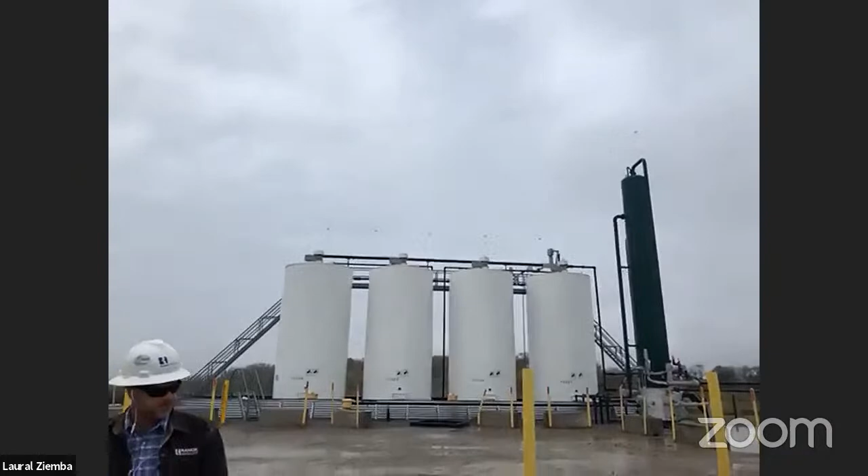All the water and all the oil produced on this site is trucked off. The water goes all to our fracs, and the condensate is hauled off eventually to a refinery. Just to your right here, Laural, we have 2 other green stacks, which are called EBUs.

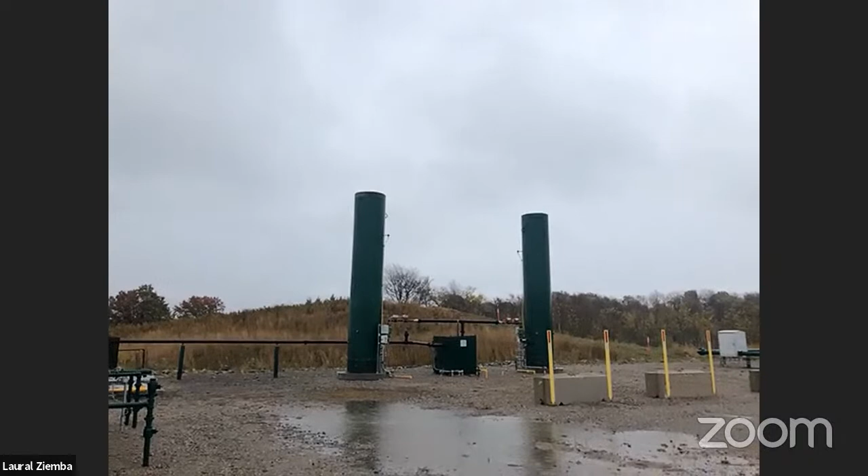They're enclosed burning units, so as a backup or another redundancy, if we have vapors in our tanks that would get too high of a pressure for the tank, we'll burn off those vapors. It's just a safety precaution to control the pressures in the tanks. That's pretty much the gist of the gas, water, and oil, and how it gets through the site.

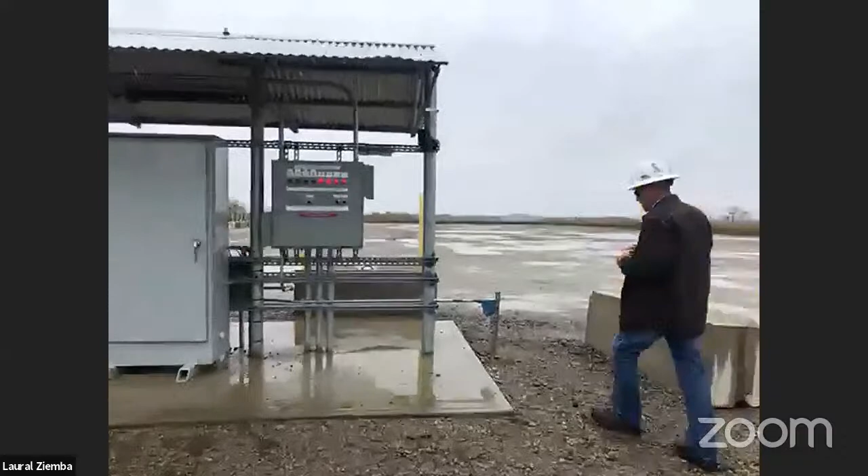A few other pieces of equipment we have. One parameter that would ESD the site is this LEL monitor right here. It's always drawing in air from the site, and if there happen to be any gas or vapors leaking from anything, this will alarm and trip, which shuts in the whole site.

I mentioned we can shut in the site remotely. Our lease operators come to the site every single day, and they all have computers and phones. They'll get alarms for any parameters that trip, including an ESD or from the LEL itself. But how do we turn it back on? Due to safety reasons, somebody physically has to come to the site to turn the well back on. Whoever's alarm tripped the emergency shutdown, they'll come here, see what the issue was, resolve it, and then manually or physically turn the wells back on.

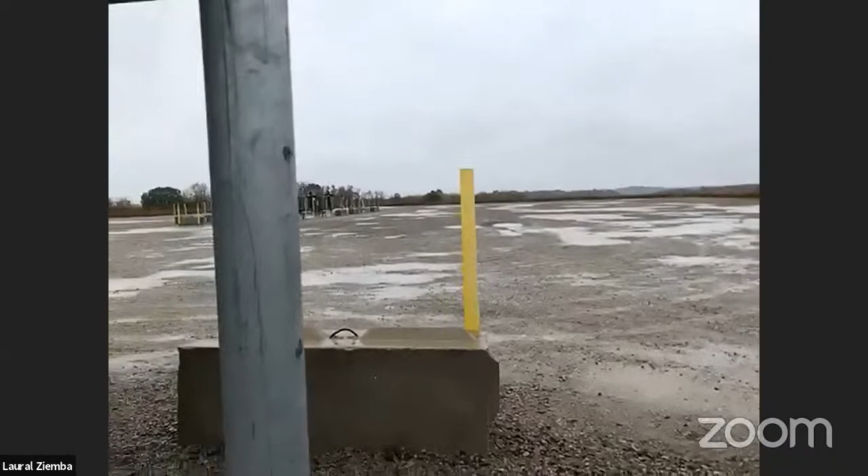Right now we're underneath a roof here, and this is called our RTU, a remote terminal unit. It's got a touchscreen on it. It's a little easier to see today, Laural, since the sun's not out. So all the pieces of equipment I just mentioned should show up there, a little bit. It's pretty much like an app on your phone.

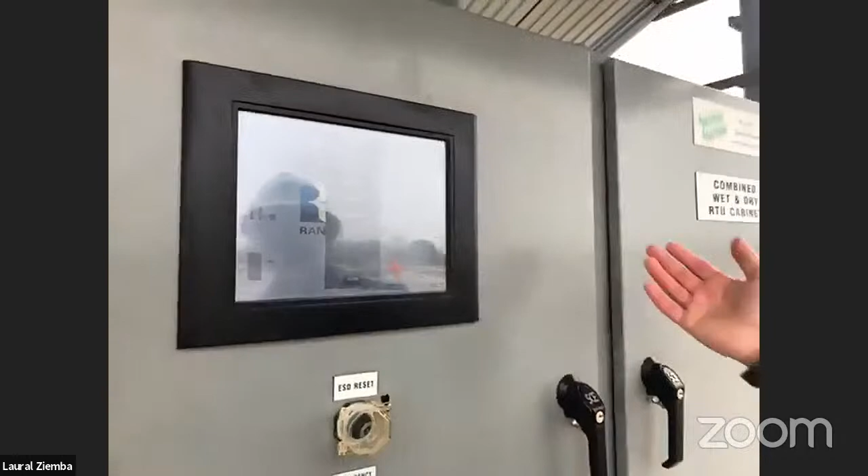The guys, the oil truck drivers and water truck drivers, can touch this and see what's in the tanks, click on a well, see what it's flowing and what the pressures are themselves. This also has another emergency shutdown button. That's pretty much the gist of what goes on at a production pad here.

So if anybody has any questions, go ahead and fire away. Hey, thanks, Bob. This is Michelle. One question came in about the pig launcher.

What is that? So all the gas goes through the pipeline, and at times, based on temperatures, once it gets underground it gets a little cooler. Some liquids still entrained in the gas would drop out into the pipeline. So they put a foam pig in, pretty much about that long, with a point, kind of like a little torpedo. It's made of foam, and it's a smaller diameter than the actual pipe itself. They'll get gas pressure behind it and run it from this pad to either the next pad or the compressor station.

That pig will run through the line, kind of like a foam bullet, and that'll push all the liquids out of the line. If you let the liquids build up, it'll eventually slow down the gas, and gas pressure will back up onto the pad and could eventually emergency shut down the site if the pressure got too high. So that's just a way of cleaning out the pipelines themselves.

What classes did you like in high school that maybe got you to where you are today?

That's a great question. Coming out of high school, I went to a medical school and trained in orthotics and prosthetics. I made artificial arms and legs for about 13, 14 years before I started doing this, working in Atlanta, Georgia. Then I moved back here, I'm from Pennsylvania. I moved back to Pennsylvania, knew somebody in the industry, heard it was just getting started, and pretty much rolled the dice and took an entry-level job as a lease operator. I've been here almost 14 years now. So I didn't have any necessary classes in high school that led me towards this, it led me more to the medical industry.